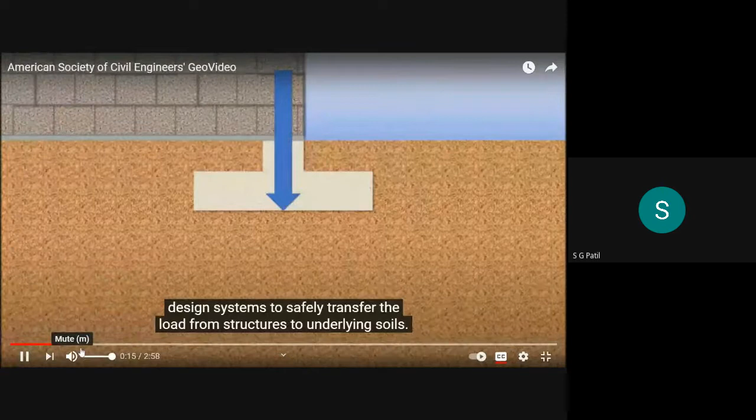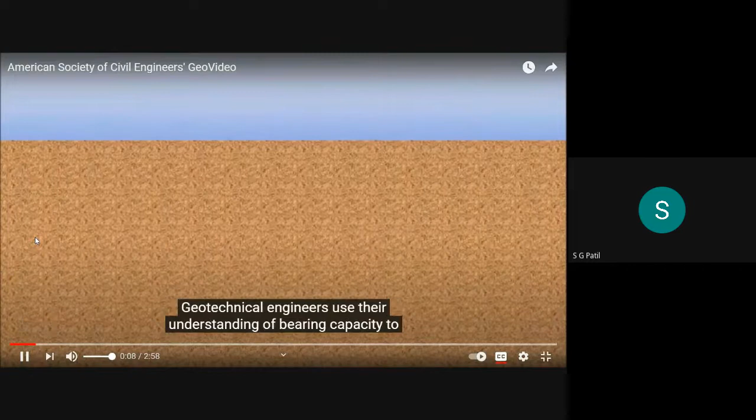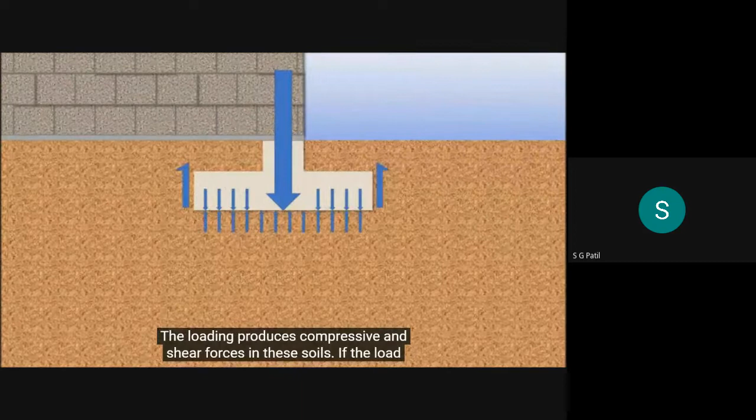Bearing capacity is the load which a soil can support without failure. Geotechnical engineers use their understanding of bearing capacity to design systems to safely transfer the load from structures to underlying soils. The loading produces compressive and shear forces in the soils. If the load is large enough, the shear forces induced in the soil will become higher than the shear strength of the soil. This results in failure.

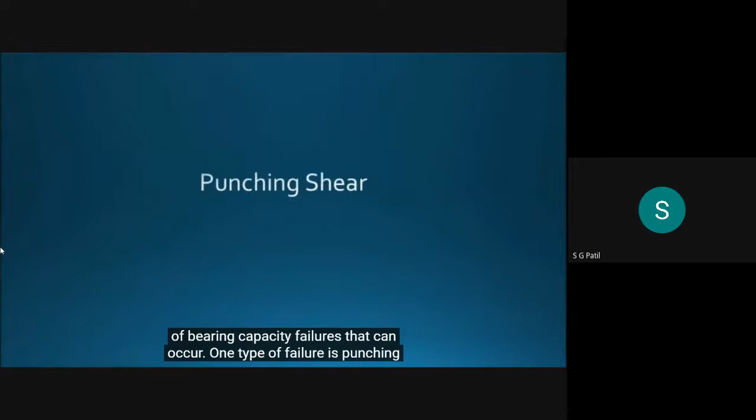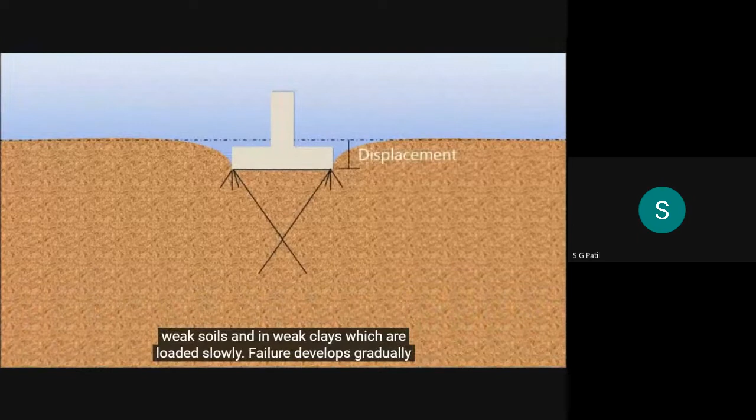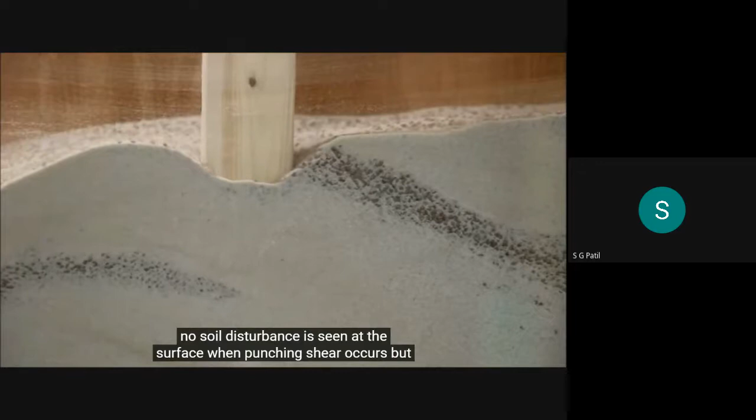There are three types of bearing capacity failures that can occur. One type of failure is punching shear. This happens in loose sands and thin layers of strong soils underlaid by weak soils, and in weak clays which are loaded slowly. Failure develops gradually in this setting due to the high compressibility of these soils. Little to no soil disturbance is seen at the surface when punching shear occurs, but structures experience high levels of settlement.

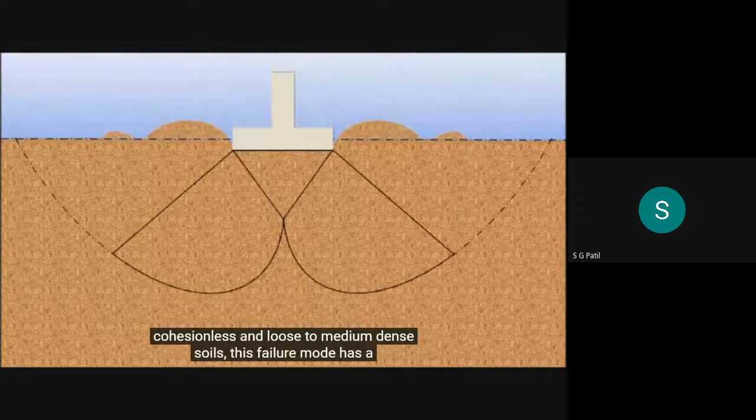Local shear failure occurs in cohesionless and loose to medium dense soils. This failure mode has a well-defined shear surface directly under the footing that may or may not be seen at the surface of the soil. Local shear failure happens gradually as the footing continues to experience settlement and movement along the shear plane.

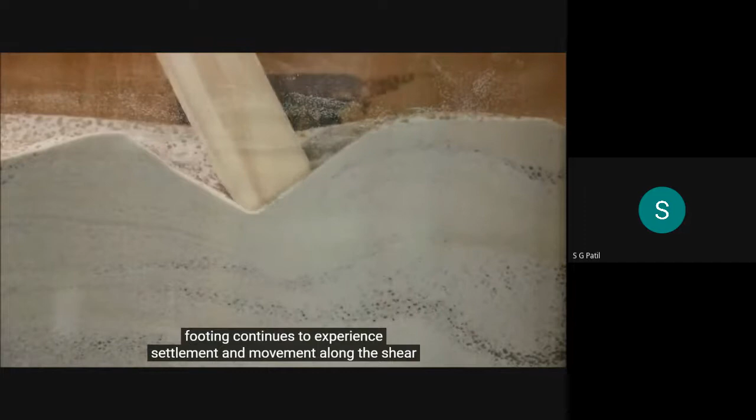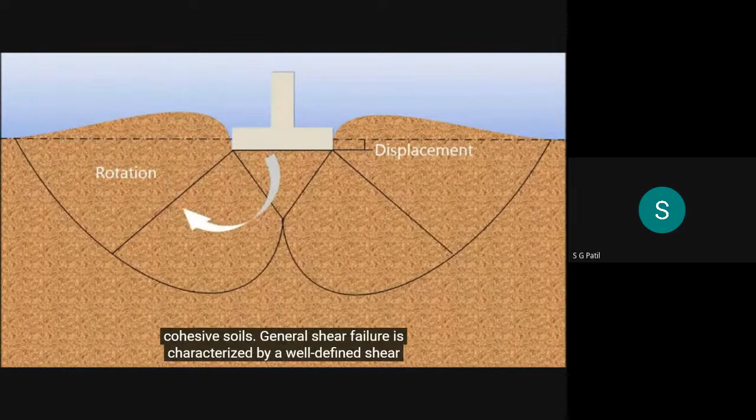General shear failure occurs in dense cohesionless soils and undrained cohesive soils. General shear failure is characterized by a well-defined shear plane with clearly formed disturbances in the surface soils. This type of failure occurs suddenly and can cause significant rotation of the structure.

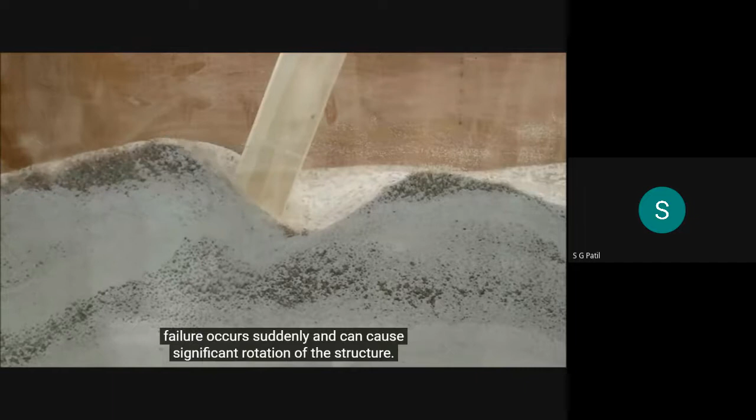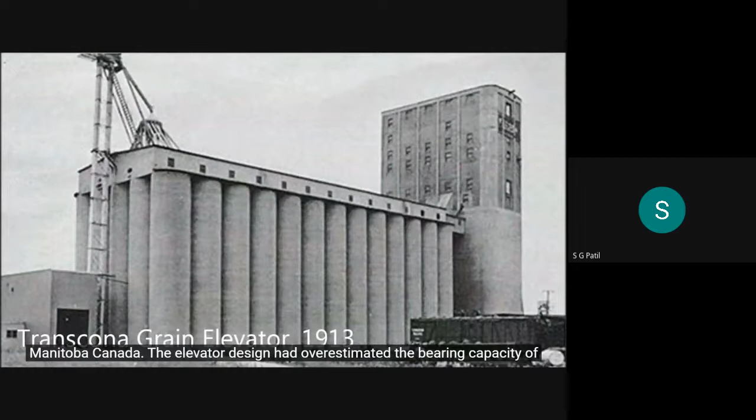Over the years, there have been several extreme instances of bearing capacity failure. One historic event involved the Transcona grain elevator constructed in Manitoba, Canada. The elevator design had overestimated the bearing capacity of the soil and underestimated the load of the grain. This led to the structure experiencing a sudden and dramatic general shear failure.

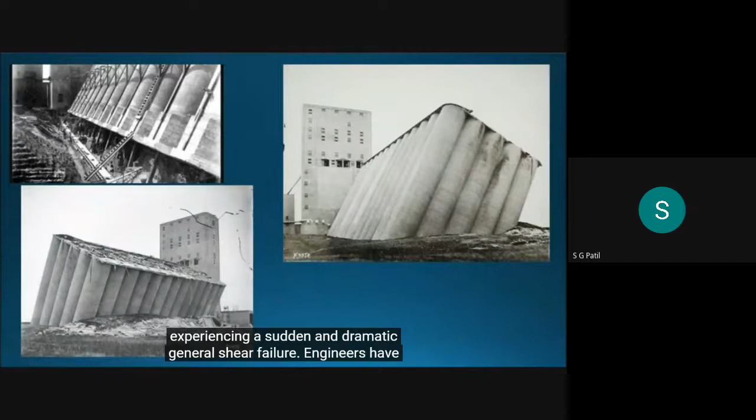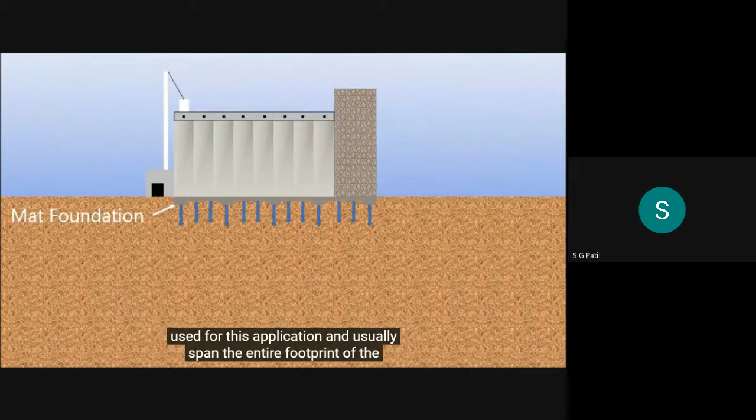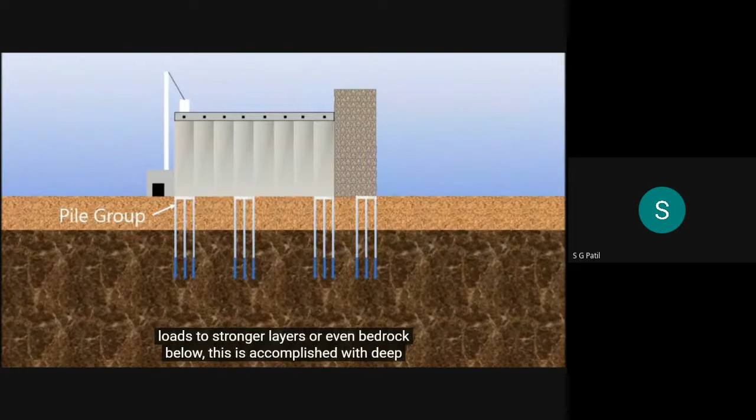Engineers have developed methods to safely support structures and transfer loads in soils with low or insufficient bearing capacities. One method is to distribute the load of the structure over a larger surface area. Mat and raft foundations are used for this application and usually span the entire footprint of the structure for support. Another option is to bypass weak soil layers and transfer loads to stronger layers or even bedrock below. This is accomplished with deep foundations. There are several types of deep foundations, generally categorized as driven piles, drilled shafts, and auger piles.

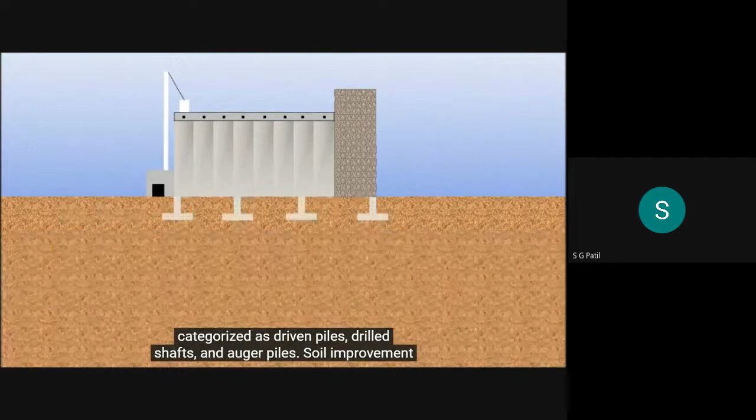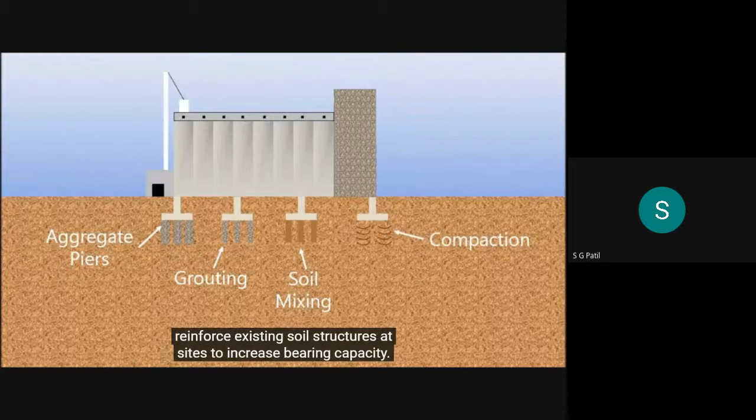Soil improvement can also be used with shallow foundations to get the necessary strength for structural support. Soil improvement technologies strengthen and reinforce existing soil structures at sites to increase bearing capacity. There are many different options for soil improvement, with new technologies being developed regularly.

Okay, so that video I just showed was about how the different types of failure mechanisms happen in the soil. They came in the reverse order here—they started with punching shear, then local shear, and then general shear. So how the soil will fail depends on the density of the soil. If you have very dense soil, general shear failure occurs. If you have moderately loose or moderately dense soil, medium dense sand, then local shear failure will happen. And if you have very loose sand, then punching shear will happen.

So as they told in the video, if you carefully observed, in punching shear there is a lot of displacement. The displacement is very high and there is very little disturbance at the ground surface in punching shear, whereas in general shear the settlement will be less, but there will be a huge disturbance at the ground surface. So that is the main difference between the extreme ends, general shear and punching shear. Local shear is in between the two—you will see a small amount of disturbance, accompanied with a larger settlement.

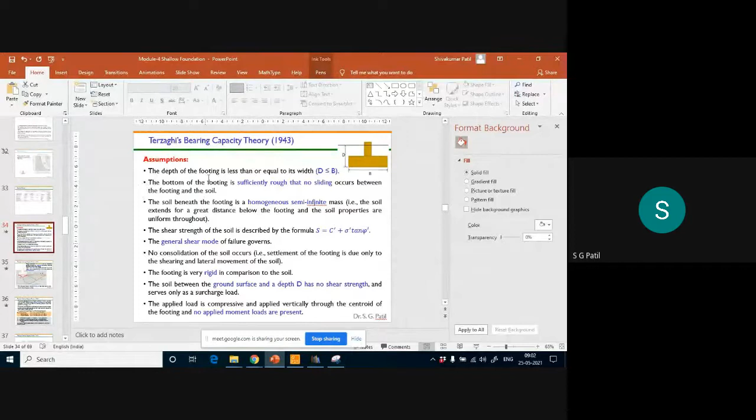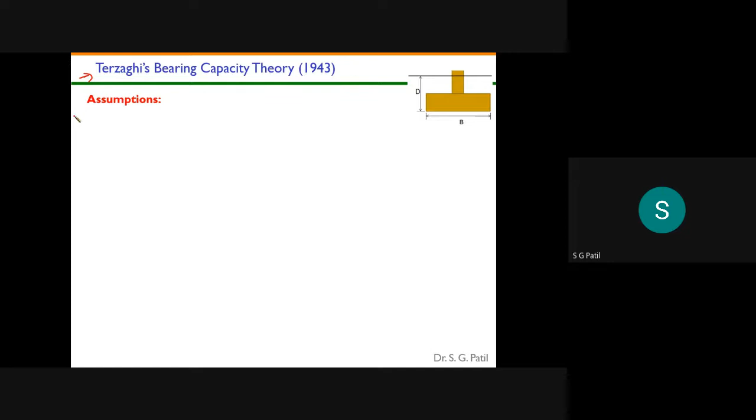So Terzaghi, before deriving any theory, we have to see what are his assumptions. First we will see the assumptions of Terzaghi's bearing capacity theory. First assumption is this theory is applicable only for shallow foundations, that is, depth should be less than or equal to breadth.

The bottom of the footing is sufficiently rough enough so that there is no sliding occurs between the soil and foundation. The bottom of the foundation is considered rough, so that he is avoiding any sliding failure.

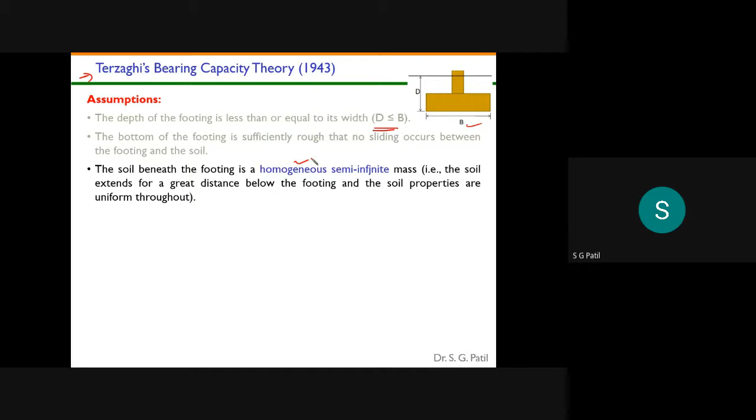So the third assumption is the soil beneath the footing is homogeneous, semi-infinite. Homogeneous means properties will be same, and semi-infinite means in one direction the soil is extending to infinity, meaning in the depth direction the soil extends to infinite depth.

So what is my fourth assumption? The fourth assumption is the shear strength of the soil is described by Mohr-Coulomb failure criteria. That is, shear strength of soil is equal to the cohesion of the soil plus the vertical effective stress into tan of phi dash, that is your angle of internal friction. This is the angle of internal friction, this is the effective stress on the soil, and this is the cohesion.

Okay, so this is called the Mohr-Coulomb failure criteria. The shear strength of the soil is derived from this equation.

What is my fifth assumption? He considered only a general shear failure mode. That means the settlement is relatively less, but the soil is failing by a rotational failure, and there will be a huge bulging on the ground. That's what general shear failure mode means. He has not considered local shear failure and punching shear failure. So whatever formula he derived at the beginning of this theory, in 1943, he considered only the general shear failure mode.

So there is no consolidation of the soil when you apply the load. Whatever settlement is occurring, he considered that as due to shearing and lateral movement of the soil only, not consolidation settlement. So there is no consolidation of the soil. The settlement of the footing is due only to shearing and lateral movement of the soil. So he has not considered any consolidation settlement.

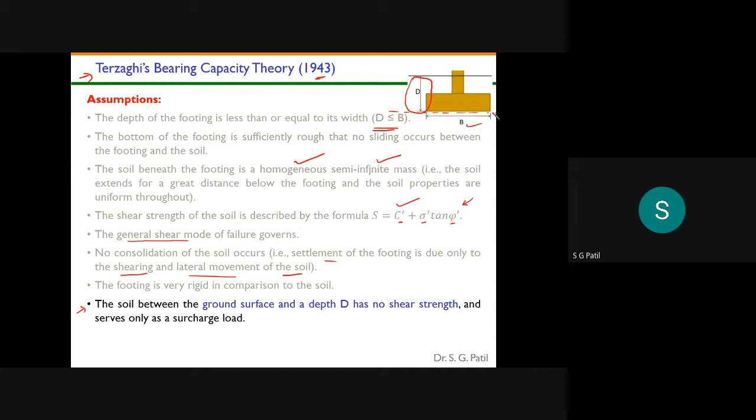My eighth assumption is that the soil between the ground surface and a depth d has no shear strength and serves only as a surcharge load. What do you mean by that? See, whatever soil is there above the footing - this is the level of the footing, and this is the failure mechanism - whatever contribution comes from this soil, he has not considered. He considered this soil only as a surcharge load.

That means gamma - suppose this is your density - gamma into d will act as a surcharge. So whatever shear resistance would be there against this failure, he has not considered. This much amount of soil resistance he has not considered, whereas he considered the shear resistance of the soil below the footing depth. Let me change the color here. So whatever shear resistance I'm marking here, this he has considered, but this other shear resistance he has not considered. That's what this assumption is about.

So what is this? The soil between the ground surface and the depth of the footing - this is my ground surface and this is the depth of the footing - this soil has no shear strength. That means this shear strength he has not considered, and it serves only as a surcharge load. So whatever soil is there, it acts like a surcharge load here. What is the intensity of loading? Gamma times d. This surcharge load is nothing but, if the unit weight of this soil is gamma and depth is d, then the surcharge load will be gamma times d.

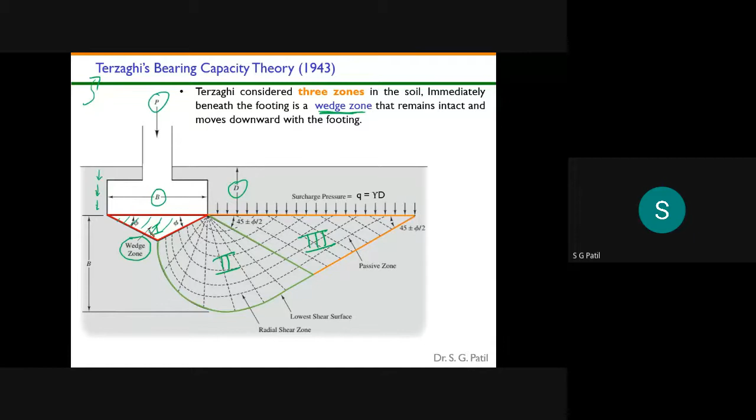What will happen once you apply the load on the footing? It will start with small settlement. Immediately below the footing, that soil will be filled and become part of the foundation. Now whatever settlement happens, that settlement will happen to both the foundation as well as this chunk of soil. Both together will penetrate as you keep increasing the load.

Then what will happen next? A radial shear zone will develop. This zone will develop, this green part. The radial shear zone extends from each side of the wedge, where it takes the shape of a shear plane that is a logarithmic spiral.

This failure shape we consider as a logarithmic spiral, not a circular one. I have shown the zones only on one side of the footing, because it's symmetric about the y-axis. Whatever zones are present, they are also present on the right side.

What is the third zone? The third zone is the passive zone, the outer portion. This is my passive zone, also called the linear shear zone, in which the soil shears along a planar surface. If you see the failure surface here, this is the planar surface, but for the radial zone it is a log spiral surface.

The solution originally obtained by Terzaghi was for strip footing. Whatever footing he considered in the derivation, he considered it for a strip footing. What do you mean by strip footing? The length will be very high, very large compared to the width of the foundation.

So three-dimensionally, this is the strip footing: the breadth dimension is very small compared to the length dimension. This is my length. That's called a strip footing. Whatever derivation he started with a strip footing, that is one with a very large L/B ratio, on the surface of the homogeneous soil.

For a footing embedded in the ground, the effect of overburden pressure is taken care of by gamma times D. This surcharge pressure is taken care of by the Q value.

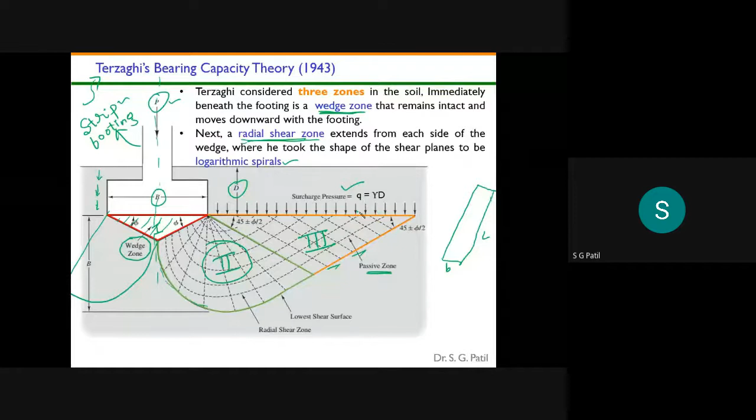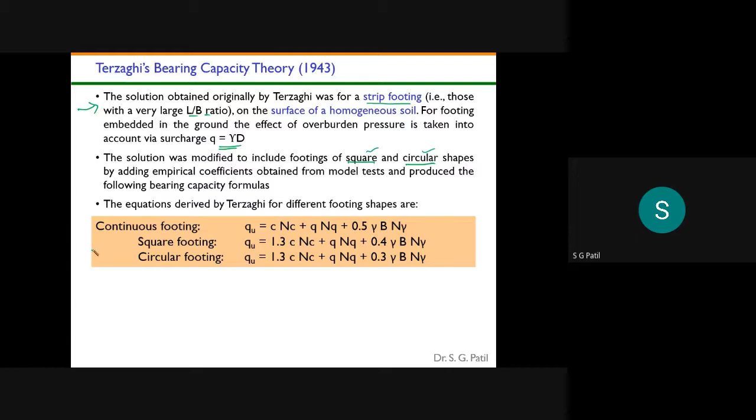The solution was modified to include footings of different shapes, like square and circular. He later worked on that strip footing and introduced shape factors so that the theory can be applicable even for square and circular footings. These are the formulas from Terzaghi's bearing capacity theory.

For a continuous strip footing, you should use this formula: the ultimate bearing capacity of the soil, Qu, is equal to the cohesion term C into Nc - I will come to what Nc is later - plus Q times Nq, where Q is the surcharge load.

Q times Nq plus 0.5 gamma times B into N gamma. Okay, so this is for continuous footing, and if you have a square footing, this is the formula, and if you have a circular footing, this is the formula.

You have to remember, only some coefficient numbers are changing here, but the basic equation is the same, only the basic coefficients are changing. 1.3 is coming extra, and 0.4 is coming extra here. So for strip footing, we will use 0.5, for square footing we will use 0.4, and for circular footing we will use 0.3.

So what is Qu? Qu is nothing but ultimate bearing capacity, and C is the cohesion, and gamma is the unit weight of soil, and Q is the surcharge, that is overburden pressure at the level of the footing base, and B is the width of the footing.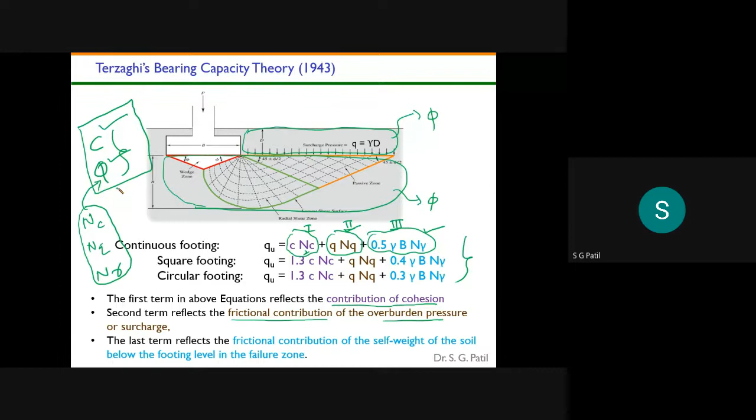So how to get those parameters? Again, NC, NQ, N gamma are there, these are the bearing capacity factors. These parameters are dependent on your phi value. So there are three ways to find out: either they are provided in terms of table, or in terms of charts, or in terms of formula. So what are the bearing capacity factors? That is NC, NQ, and N gamma.

In the same way, in the later part, in 1973, one more scientist, that is Vesic, worked on the Terzaghi bearing capacity theory and proposed some improvements to this theory. That I will discuss in the later part of this lecture.

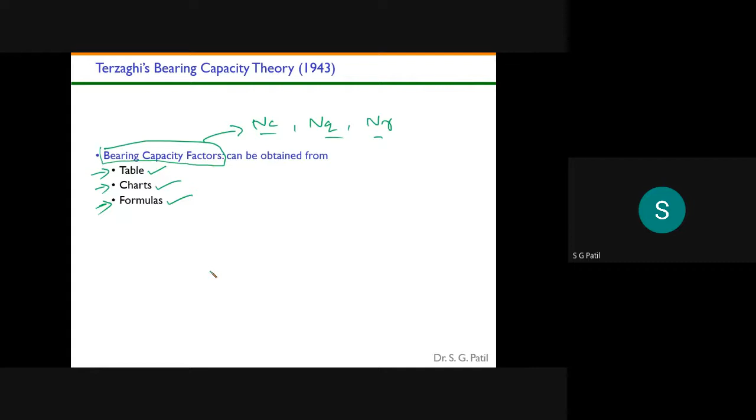But if you refer to IS 6403, or some relevant textbook, they have provided these phi values up to 40 degree, 35 degree, or 40 degree, along with NC value, NQ value, and N gamma value. In the examination they will give you a phi value, and for that corresponding phi value, they will give you the NC value, NQ value, and N gamma value. So this is one way of obtaining NC, NQ and N gamma.

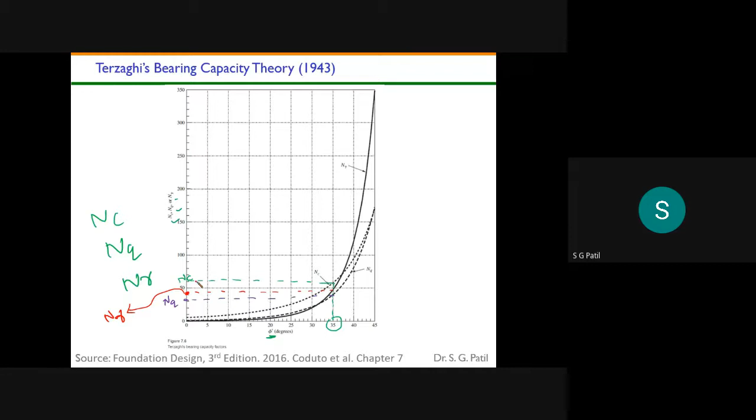But you need not to remember these formulas. In exams, NC, NQ, and N gamma will be provided, so you don't bother. I've shown these equations just for completeness purpose. No need to remember these equations. Always this NC, NQ, N gamma will be provided.

Or if they don't provide it, then what will they do? They will allow you to carry IS 6403. If they allow you to carry this 6403, then no need to remember even, they need not give NQ, NC, and N gamma values. Directly you can refer to that 6403, and in 6403 we have table number 1. If you refer to table number 1, these values you will get: NC value, NQ value, and N gamma value, everything you will get.

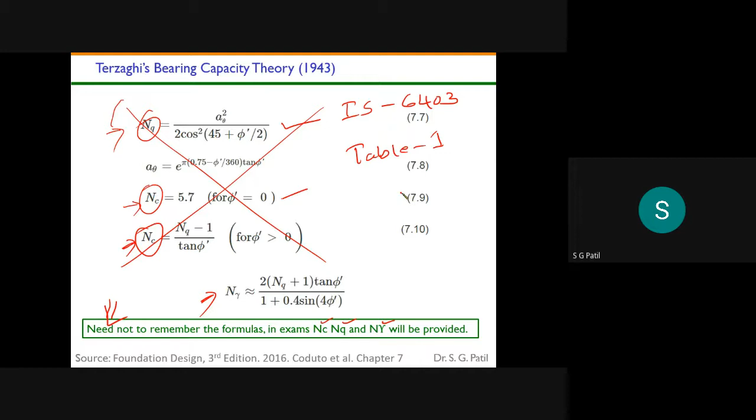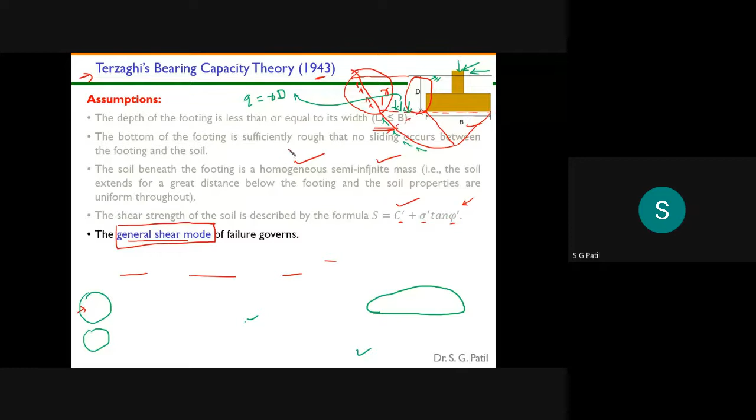Okay, so whatever formulas we discussed were based on a certain assumption. Do you remember the assumption? This is the general shear failure mode. So initially Terzaghi developed these for general shear failure mode, then he modified them even for the local shear failure mode.

So now let's look at the same Terzaghi's bearing capacity theory for local shear failure. Previously we discussed the general shear failure mode. So for strip footing, square foundation, and circular foundation, these are the formulas you should use.

But if you write both equations side by side, there will not be much difference. Only some coefficients will change. The basic format is the same: CNC, QNQ, gamma B N gamma. Only some coefficient values will change here.

And you see this NC dash. Earlier I used NC, NQ, and N gamma, right? Here I am using NC dash, NQ dash, and N gamma dash. These are nothing but the bearing capacity factors for the local shear failure.

Again, these are also a function of the angle of internal friction, phi value. So to obtain NC dash, NQ dash, N gamma dash, we have to convert this phi value to phi dash value. Then for this phi dash value, you look up the NC, NQ, N gamma value. That itself will become NC dash, NQ dash, N gamma dash.

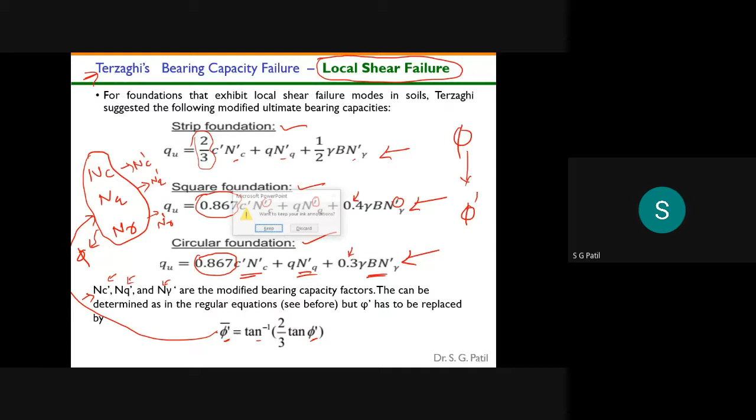Please respond. Anybody, if you understood, then I will continue, otherwise I will repeat it. Any confusion here, about how to get NC dash, NQ dash, and N gamma dash values? Any doubts? No, sir. No doubt, Aishwarya, brother? Any doubts? No, sir.

So see, till now we discussed the assumptions of Terzaghi's bearing capacity. Initially in 1943, Terzaghi started with only the general shear failure case and strip footing, so his initial derivations were applicable only for that case. Later, just as humans evolve over time and understanding improves, once Terzaghi understood his limitations, he improved upon that equation.

So first he started with the general failure case for strip footing. Then he understood that local shear failure also exists, so he worked out how to find the bearing capacity for that local shear failure criteria. He introduced the NC dash, NQ dash, and N gamma dash bearing capacity factors. So how do you get those reduced bearing capacity factors?

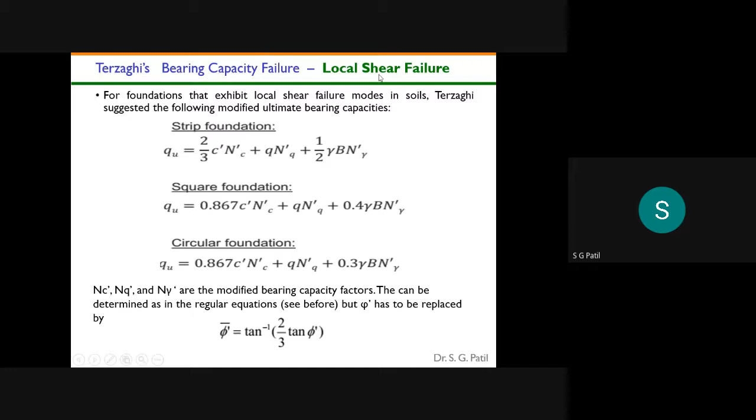So these are the formulas we should use for the local shear failure case. Now there's a problem here that we'll see, and then see how these different shapes will change my bearing capacity.

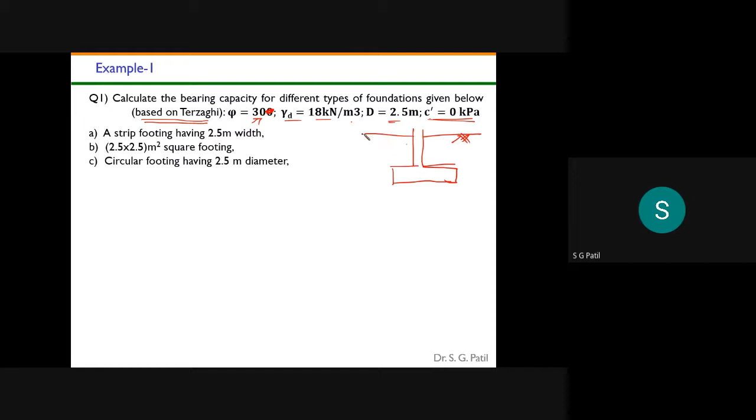Let me draw the figure here. So here, this is my foundation. This is my ground level. This is my depth of the footing. Depth of the footing is how much? 2.5 meter.

And what is the cohesion of the soil? Cohesion is 0 kPa. And what is the angle of internal friction? Phi is 30 degree.

What he is asking is to find out the bearing capacity for 3 cases. Case 1 is by considering this as a strip footing. Then assuming this as a square footing, and assuming this as a circular footing. This is for circular footing, this is for the square footing, and this is for the strip footing.

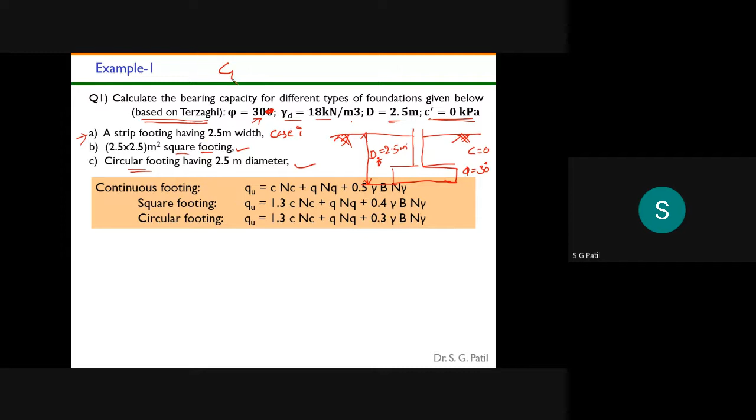So what are the formulas I should use? Now I am talking only about the general shear case. So for time being, forget about the local shear. Don't forget - I will stick only to the general shear failure case, what Terzaghi in the initial stage derived. In the general shear case, I am using only NC value, NQ value, and N gamma value.

So for the continuous footing, I should use this equation. For square footing, I should use this, and for circular footing, I should use this. So here, what are the inputs?

C anyway is 0. So NC I don't know, NQ also I don't know, and N gamma also I don't know. How can I find out these NC, NQ, N gamma? These are functions of what? NC, NQ, and N gamma are functions of your phi value.

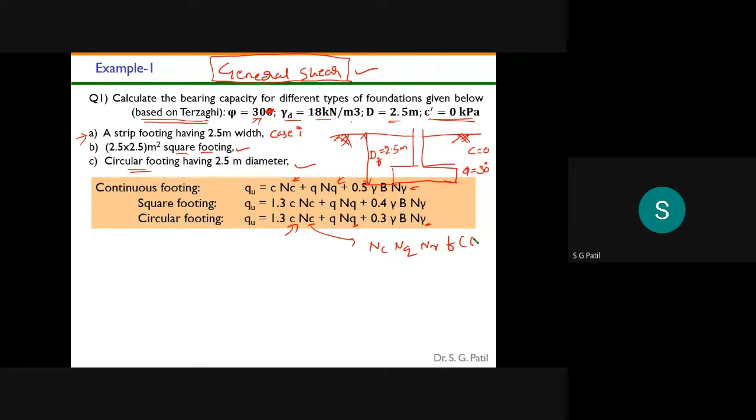For different phi values, I have NC value, NQ value, and N gamma value. So what is the phi value in this problem? In this problem, phi value is 30 degree. For 30 degree, corresponding NC is 37.16, NQ is 22.46, and N gamma is 19.13.

I first calculate for the strip footing. So this is the equation for the strip footing, this is nothing but Q value, this is sigma, whatever sigma is there. This is Q value. So it's C dash into NC plus Q into NQ plus 0.5 gamma B N gamma.

I think the C value given is 5 kilopascal - just a minute, here it says 0, but it's not 0. Here you take 5 kilopascal, this is not 0. C value is 5 kilopascal. So I think I misprinted here, while printing I made some mistake. So this is 5 kilopascal, C is 5 kilopascal.

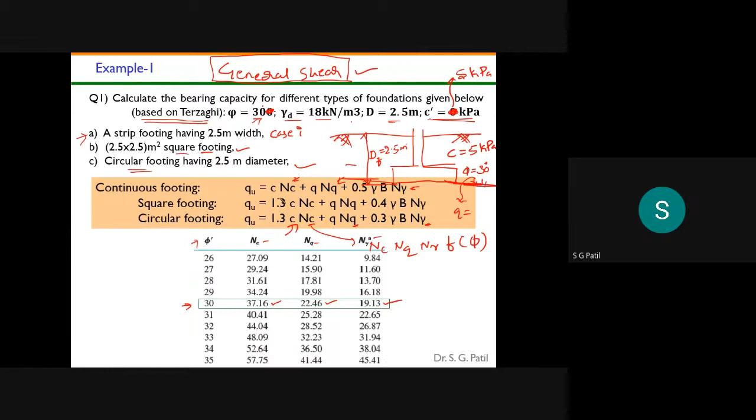For the same soil profile and same condition, if I have a square footing, how will it change? For the square footing, this is the formula I should use: 1.3 C NC plus Q NQ plus 0.4 gamma B. 4 by 10 is nothing but 0.4, and this is 0.3.

So if I have a square footing, what bearing capacity am I getting? 1598, a little bit lesser than the strip footing. And if you have a circular footing, 1512 kilopascal, still lesser than the square footing.

So what conclusion can I draw? For the same condition, if you change the shape of the footing, then your bearing capacity changes. For the strip footing we get the highest bearing capacity, the square footing a little lesser, and for the circular footing still lesser than the continuous or strip footing and square footing.

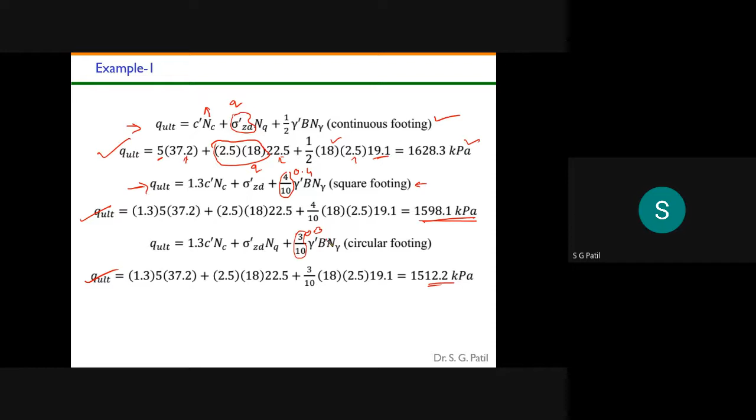Understood? Any doubts here? So whatever problem I solved is for the general shear case. General shear failure case. So for the same thing, if you assume it as a local shear failure case, what will change? It will change your NC, NQ, and N gamma terms. Those only will change. What will they become? They will become NC dash, NQ dash, and N gamma dash.

But how to judge whether soil is failing by general or local shear? By looking at the phi value, I can judge whether the soil is going to fail in general shear or local shear. In practice, if the phi value is greater than 35 degrees, I consider it a general shear failure case. If the phi value is less than 35 degrees, I consider it a local shear failure case.